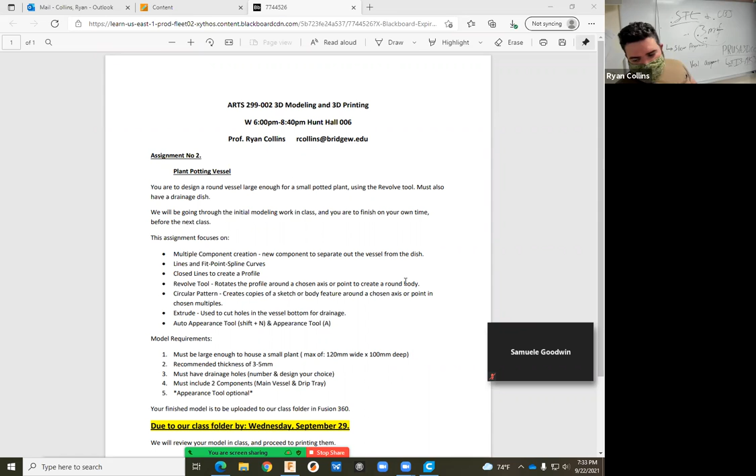So the criteria for this project: it must be large enough to house a small plant. So something like 120 millimeters wide by probably 100 or just so deep. So some sort of vessel like that. I recommend a wall thickness of like 3 to 5 millimeters thick. Honestly, 5 is kind of overkill, but again, modeling it for modeling's sake. It must have drainage holes, and the number and design of which are totally up to you.

It must include 2 or more components. Really just 2 components. Now, so far we have not discussed components. Components are above sketches and bodies and so forth on the hierarchy tree. I'll explain that more in a moment. We'll also start playing with the appearance tool. What that allows you to do is assign appearances to your models. So you're not just working with the default gray or the auto-assigned things. It's like you can assign, hey, I would like this to look like it's made out of aluminum or wood or stone.

Ideally, this is for modeling effectiveness, but that also could potentially build into, if you were taking this to a machine shop or working directly with one, yeah, this is going to be machined in aluminum, and you would go through the steps to do so. But for right now, it's really just for the sake of appearance, so you can make it look like what you want it to look like. And this will be also due next week, along with the badge. These work very much on the same tool sets as the badge does.

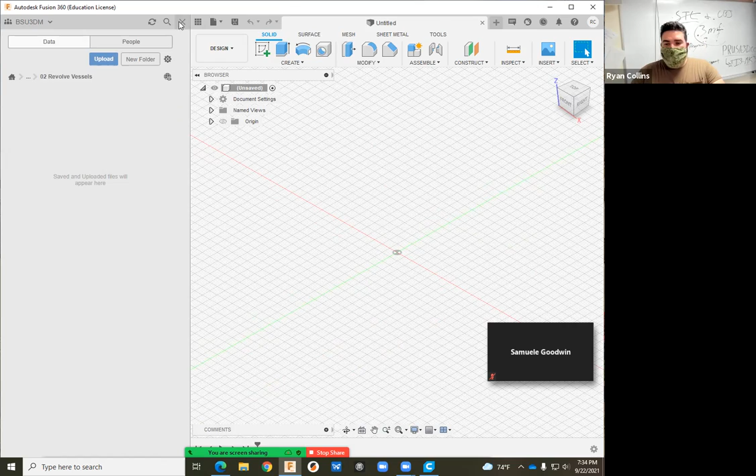All right. So let's get to Fusion. All right. So this will be starting a new project. So in the data panel, remember that we will be in the Revolve Vessels folder. So when you go to save stuff, please make sure it's in there. So you can freeform this. You can model this off of something, whatever you would like. Perfectly fine either way. But I'm just going to freeform this.

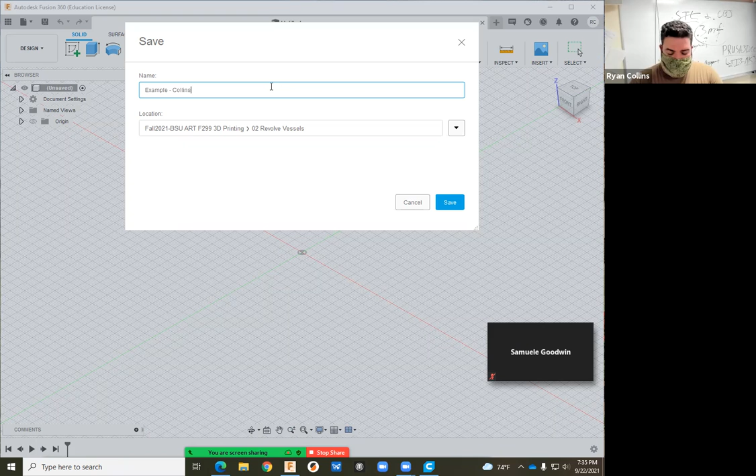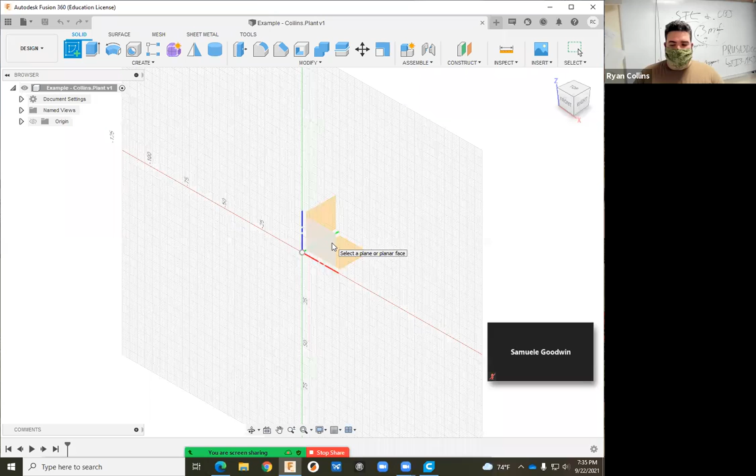So, like I said before, first thing to do, really good, save your file immediately. Save. Example, and we'll do Collins.plant. Sure, there you go. Put your name into the file itself, so that way we know who it is. All right. So we're going to start with sketches. So create a sketch. Before we were working on the XY plane; here I'm going to choose the one in front of me, the XZ plane, between the red and the blue. Ideally, switch the view cube to the front view.

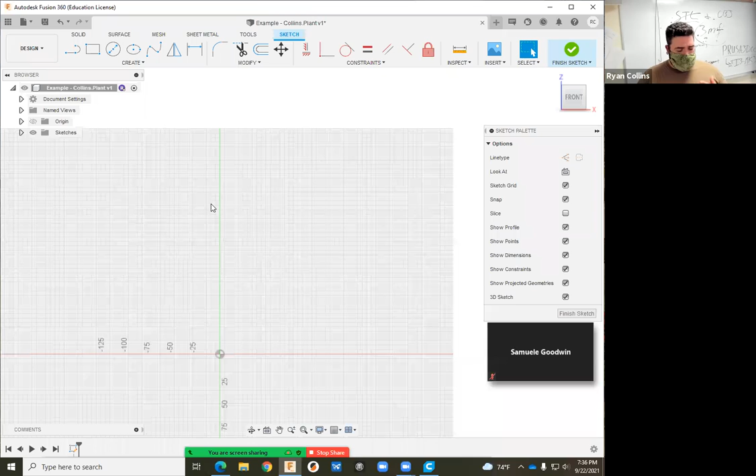All right. So I want to show you a couple things, and one of which is why might you want to use separate sketches, and why might you want to make sure to use construction lines in your sketches. This would be a perfect place to use a construction line sketch for a reference box. What I mean by that is, all right, I want my project to be 120 millimeters wide by 100 millimeters tall. You can go smaller, rough it around that, but that's basically what we're going for.

So I'm going to start with a center rectangle box, and I'm going to select line type construction or press X, and I'm just going to start right in the center. And from there, I'm going to type in 100 millimeters wide. Oh, I'm going to make that 120. And then 100 millimeters tall.

I accidentally made it a little bit bigger. There we go. That makes more sense. Okay. And I'm going to finish that sketch. That's all I want for that first sketch. So I'm going to expand the construction or the hierarchy tree here.

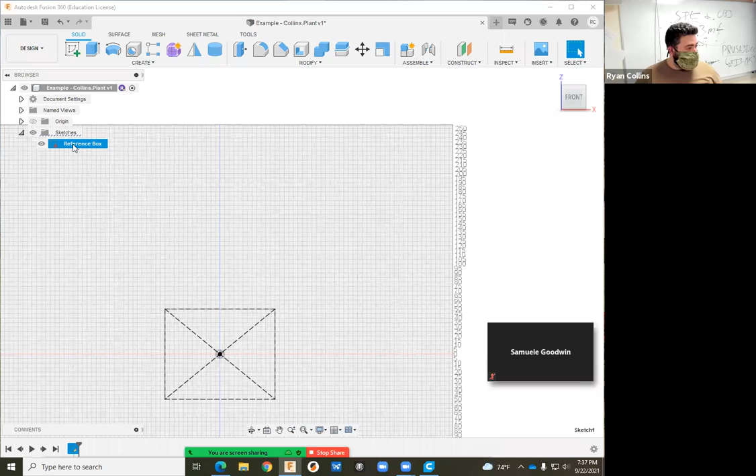And I just want to put in a reference box. So that's just so I know how big the thing is. Once inside of that, I can play around. All right, let me resize to that. Hit F6 to resize. And now I'm going to start another sketch. This is going to be the actual sketch for the pot. Okay, so I want this to be about yay big.

Now, how the Revolve tool works, think of if you've ever taken ceramics and sliced something in half, or you've broken a glass and seen just the edge. You are creating half of a profile, and what we're going to do is use the Revolve tool to create a 360 version of that slice of your vessel.

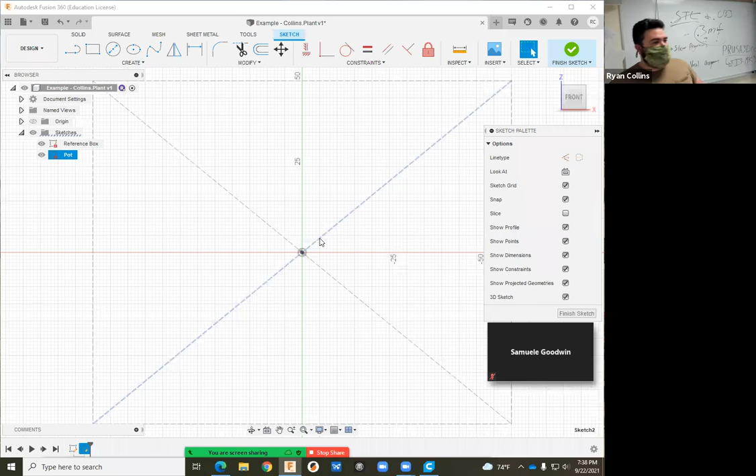Now, you do not need to make both sides. It's not like you're taking a mug and slicing it entirely in half. That, like the old Mad Hatter and half a cup of tea, not quite like that. You only need half of that half, or in other words, a quarter. So you just need one side of a profile.

All right, so what that means is I'm going to start my project on the green line. I want to use that as my bisecting line. And I'm just going to free form a line. I'm going to start somewhere in here. I'm going to allow the snap to lock onto the center axis there. And I'm just going to start drawing outward. I'm using a fit point spline here. I'm going to make this wider.

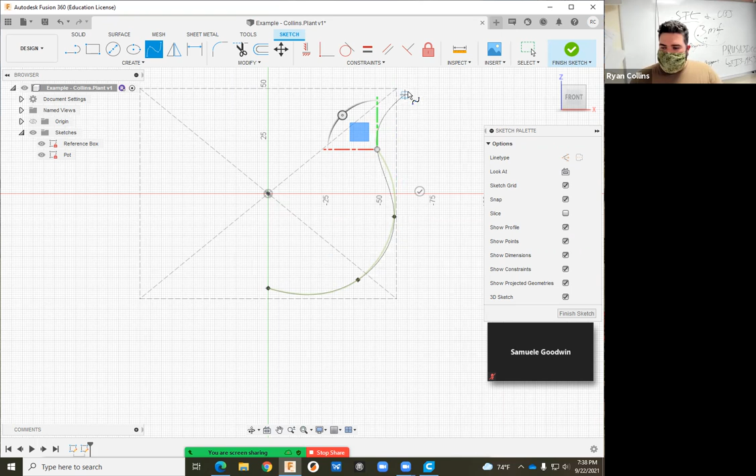Remember, it's going to be a straight line, the first 2 points, and then from there, it's going to start to curve. You can curve upward. You can start to go inward. It's not like you're locked into only being inside of that. If you want it to be a little bit larger, somewhere like that, that's fine. Just giving you those rough dimensions as a general guide. Say, all right, I want it to be about that big. I'm going to make a big wide lip on it. Cool. Hit OK or enter.

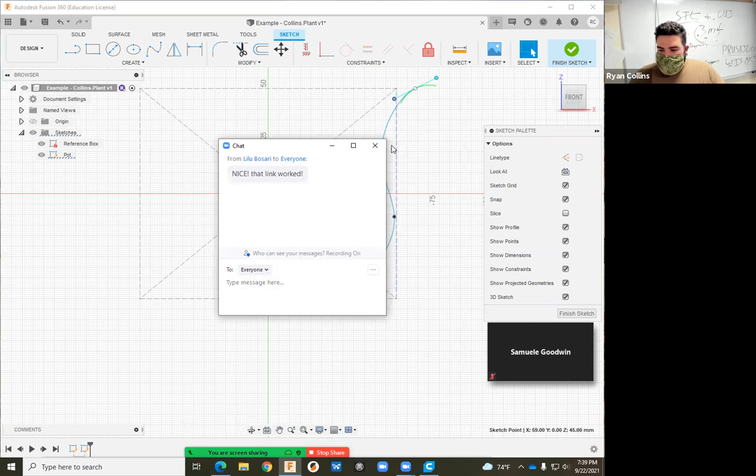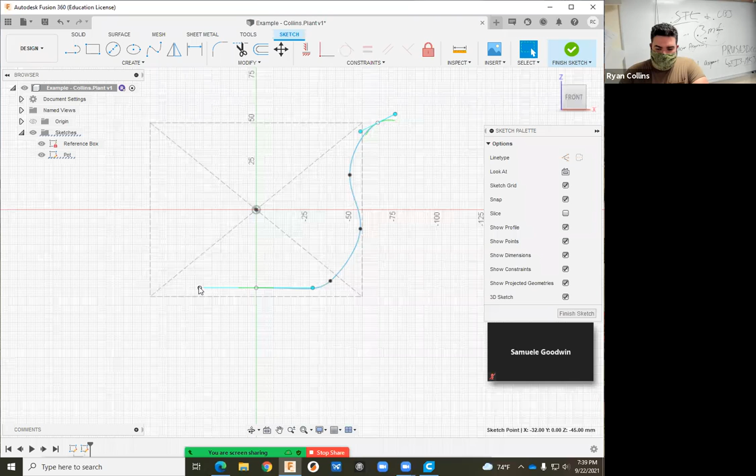Now, one of the things I'm going to want to do is flatten this bottom. I can use the handlebars on this to draw outward and bring that in line. Let me zoom in. What I did is I just dragged that handlebar until it snapped to one of the grid lines. Now the bottom here is more or less flat. Of course, I can still drag this vertex down and make it a little better. There we go. Okay. I hit OK, finish that.

Now, this is where the offset tool is really helpful. Yes. Sorry? That's a separate sketch. So if you see on my hierarchy tree, the reference box, that is the sketch line here. And I changed them to construction lines to use them just as reference points. Oh, okay. Yep. No problem.

So the offset tool here is really helpful because, as it says, it copies your sketch line a specified distance away. You can read it for yourself. But what that means is I can make alterations to my original line and that offset will follow suit. If I made alterations to the outside, depending on what those alterations are, it will carry over to my offset line. Makes it a lot easier to make forms freeform, but maintain certain distances.

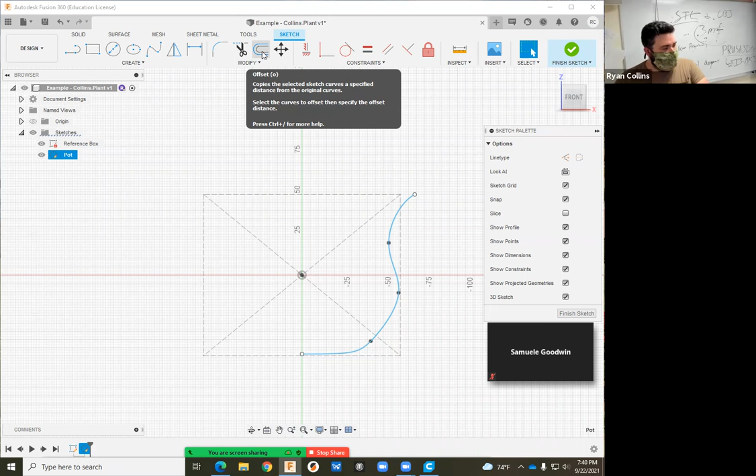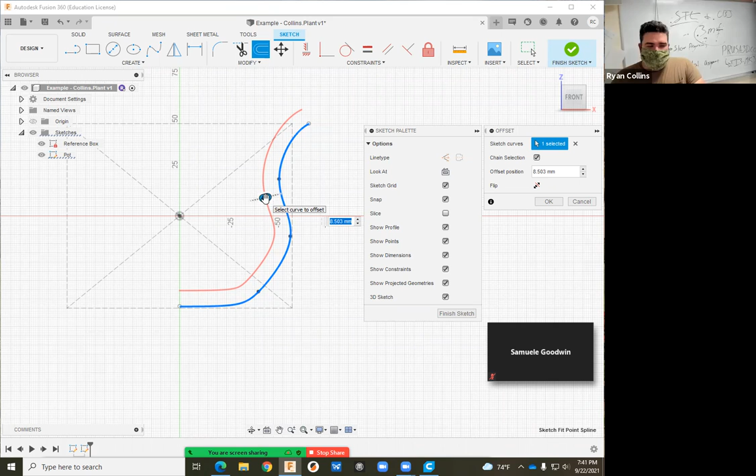So I'm going to use an offset tool. Of course, the box covers that. So there, whoops. You can use the slider or you can do it numerically. Like I said, 8 is right out. Honestly, I would really use like 2 to 3 millimeters. 3 millimeters is a good wall thickness. And there we are. Okay.

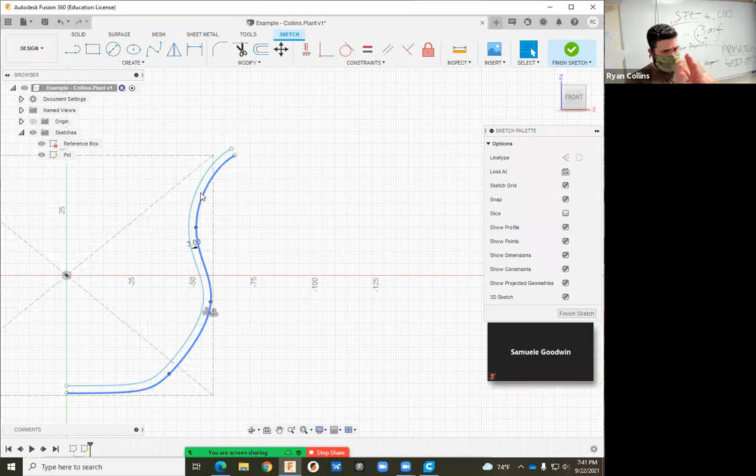So from here, in order to make the Revolve tool work, this needs to be a closed sketch. Right now, these are just 2 blue lines, but there's no blue hue inside to show that it's a closed sketch, meaning it's 2 open lines. There's no cap between them. So what I can do is I can just draw lines between here, or I can play around with that.

So for right here, what's going to be the base of my Revolve, I'm going to just use a straight line, connect those 2 points. Hit OK. All right. For up here, I could draw a straight line between there, but that's boring, and I don't want to do that. I don't want it to have a sharp lip, effectively. If this were a glass, you don't want it intentionally to have like a sharp lip. I want that to be rounded.

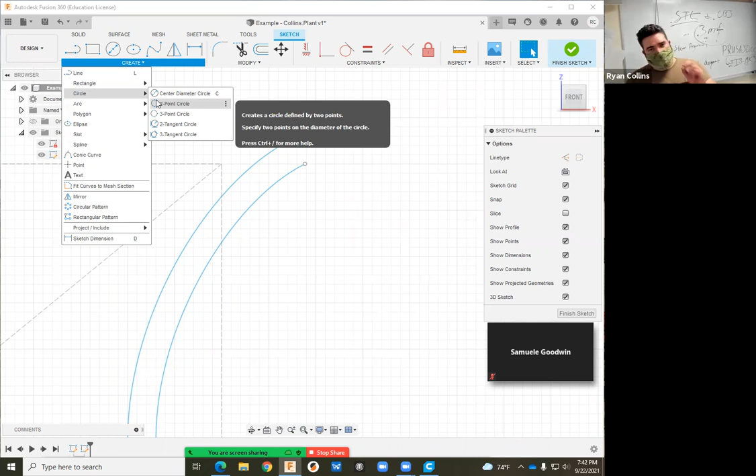It's just my preference. So to do that, I could use either an ellipse tool, or I can use a circle tool. But rather than have to draw extra steps, I'm going to use the circle tool, but I'm going to use the 2-point circle. So what that does is rather than starting in the center and drawing outward, you start at 1 point, and then the second point defines the diameter of your circle. So click there. I'm going to select 1 point, and then you see it draws outward, which, what do you know, the diameter is 3 millimeters. Click there, hit escape to finish that tool.

Great. So now you have these 2 separate lines, and now when I mouse over, it shows that by highlighting like that, they are closed profiles. Now I do want to trim this section out, so I'll go up here, use the trim tool, or just press T, chop that little chunk out of there. There we go. Hit escape. Okay. And in effect, the basic part is that's all you need for a profile. So I'm going to hit finish sketch. I'll come back and tweak that in a few.

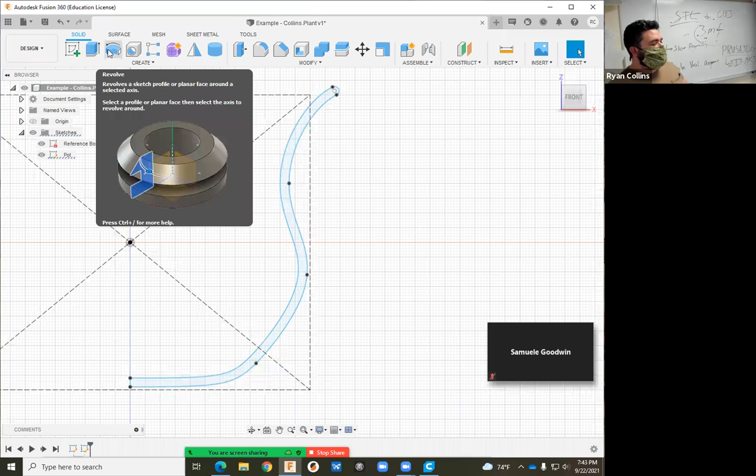The next tool I want to use is the Revolve tool. So whereas the Extrude tool took a profile and drew it straight out, what the Revolve tool does is it takes that profile and revolves it around. Often this is also called the lathe tool. So if you're familiar with working with a lathe, your material is spinning and you're cutting away from it. Kind of sort of the same thing. You're creating just a singular profile and rotating that around.

So I'm going to select that. Toolbox comes up. Select my profile. That one, the one that I did make. Now, unlike the mirror tool, you can just use the basic axis as your rotating axis. So the next tool, select axis. I'm going to hit the home button so you can see a little bit more clearly what I'm doing here. So now looking at a perspective view, you can see I just have this one single profile floating in space. I'm selecting the Z axis as my point of rotation.

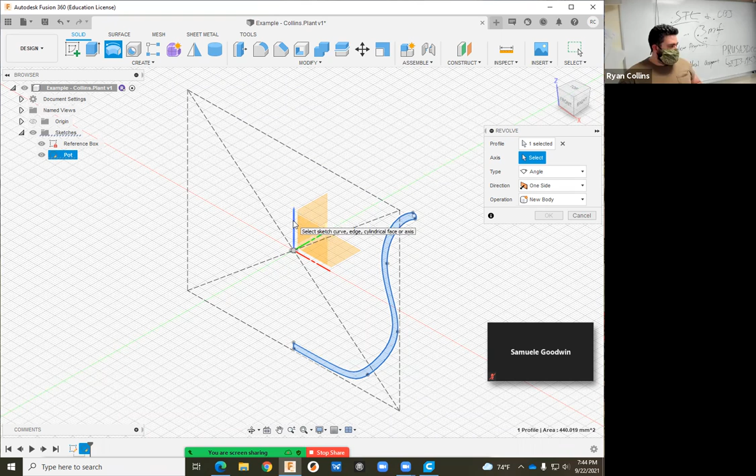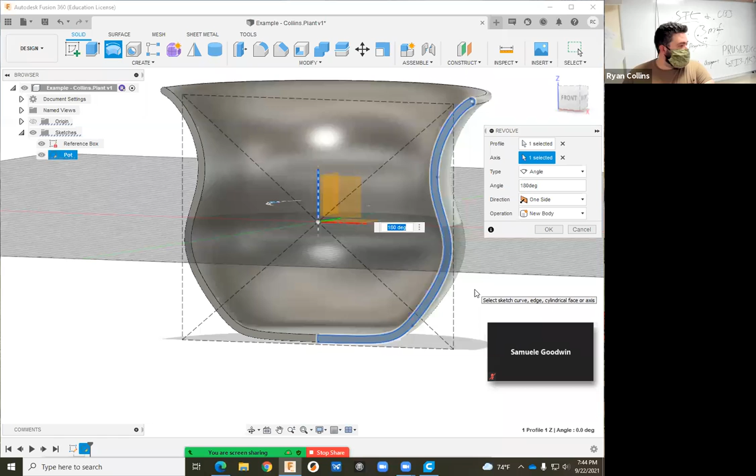Boom. Instant vessel. Now, this is set on angle, and you can dial this back. Say you were actually making just part of this. Maybe I wanted just half of a pot. I wanted to make that half a cup of tea. Type in 180 degrees, and now you can see what I meant by a cross section there. Just that little chunk. But for what we're doing, I want the whole thing. So back to 360. Hooray. All right, now this is going to create a new body. Okay.

So far, I've created just that vessel. Yeah, it's a little large, a little garish, whatever. You play around with it as you like. But I want to create the plate that it sits on as well. I'm going to get to the features and such. But so far, as I've said, you will need 2 different components. And so far, we've been just working on one.

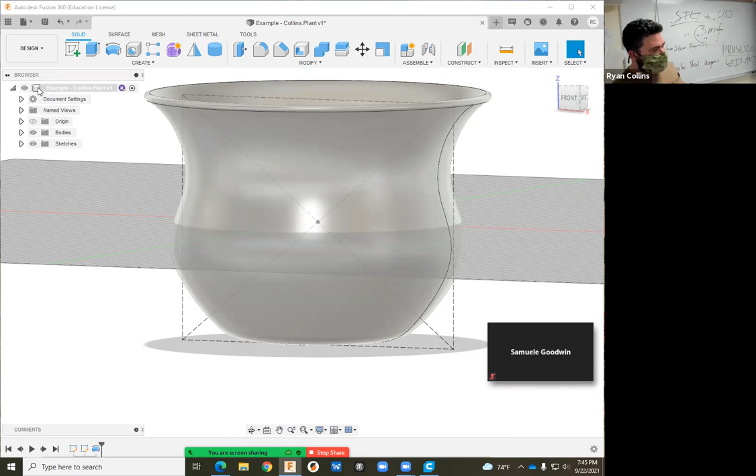A component is the highest type of hierarchy on the hierarchy tree. What that means is a component can contain bodies, sketches, canvases, all that sort. And then you can make another component and it can have its own set of all of that. The reason for this is so you can separate elements out and not just by bodies. Later on in the course, I'm going to show you how to create hinges and joints between 2 separate components, and they need to be separate components.

Now, when you go to create a component, when I'm mousing over right here, this little square, that's showing me that is a singular component. To create a component, you go over to the assemble section, the top one, that's by default, this little stack of cubes. This says new component. Click here.

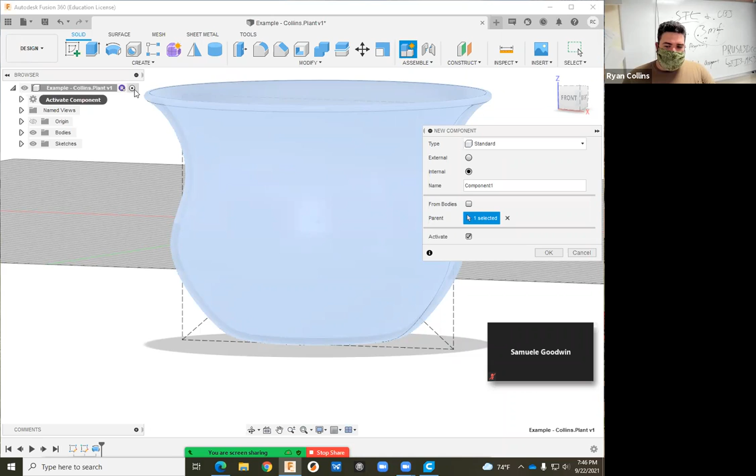Now, you can create a new component from separate bodies. So say you actually built a whole bunch of stuff within the same component. You got a stack of bodies, and you want to make a new component out of one of those, you can do that. But for right now, I just want a separate component entirely. So I have the main part selected here, and I'm going to show you what I mean by that in a moment.

And I'm going to click OK. Now there's a new thing here. So a couple things happened. The body there, it ghosted itself out. That's because you're going to be starting a new thing entirely. Top of the hierarchy tree, let me collapse everything. Now you see that the symbol has changed. It's a stack of little squares, or cubes rather. That's showing there's multiple components within that component, or at least there's more than one.

So we've got down here, and I'm going to put this as tray. Okay. So now I can expand this out, and right now there's only origin. But I can now build a set of sketches and everything else within that component. And when you're working like that, you have to activate the component. So unlike all the way to the left, which hides and shows the little eyeball symbol, this little checkbox here, activate component. If I want to go back and activate everything, I go to the very top, click there, activates all the things. But I just want to work on just the tray component.

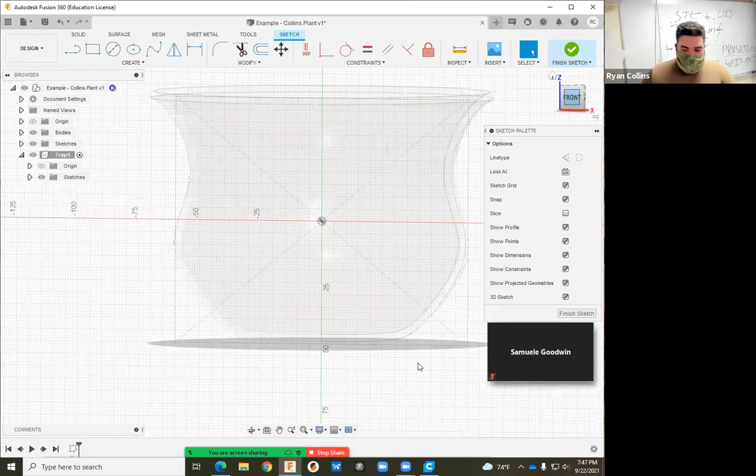All right. Now, when I click create sketch, working on the same plane rather, right there. Now you see it's expanded and created sketches down there too. All right, cool. So now I'm going to do the same thing. I'm going to create a tray. I want to use a fit point spline again, somewhere below there. Doesn't have to be right against, somewhere below. And I'm just going to kind of draw what would become a little tray. It's going to have a little bit of a lip. Hooray. There we are. That'll work.

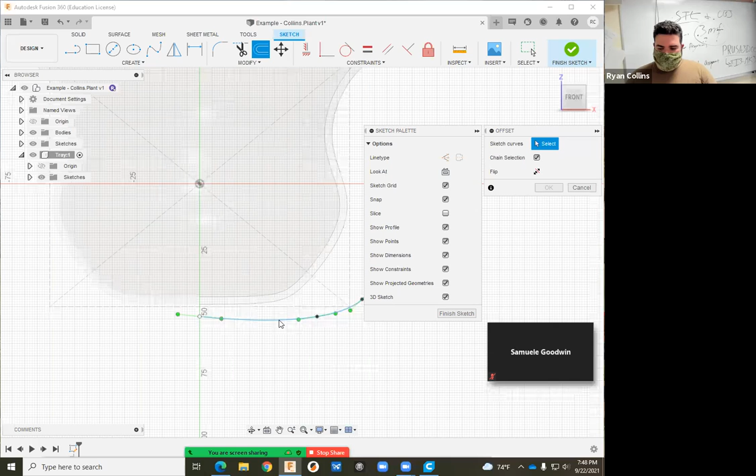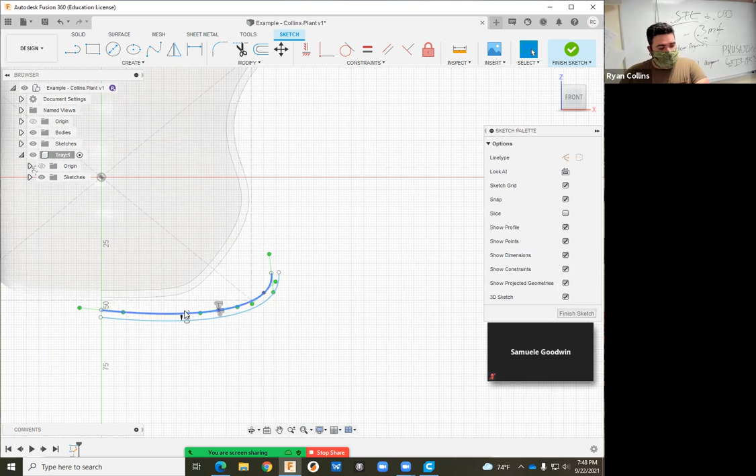I'm going to use the offset tool. I'm going to go outward from here and make that 3 again. Whoops, I need that -3. I want that to go the other way. All right, there we go. So now the new offset line is larger rather than smaller than the original line. Okay, super. Now, like I said, you can adjust these. Things like this little dip in what will be this tray. If I were to make this, that would make for a very bad plate.

So I'm going to zoom in here, and I'm going to adjust the handlebars on the initial point. Yep, that one. And as you see, now my offset line follows the tweaks that I'm making. So that's how you can adjust all of this stuff. Really helps out. This one's still not quite flat. I'm going to drag this around. Yeah, sort of, kind of-ish. One is an offset of the other. Oh, okay. Yeah, of course.

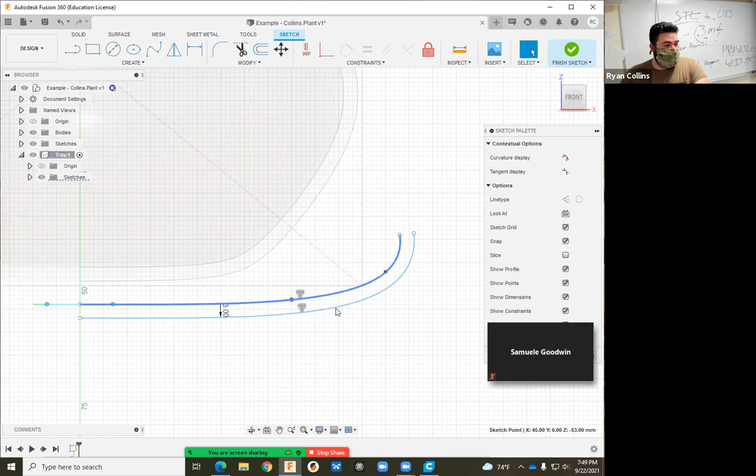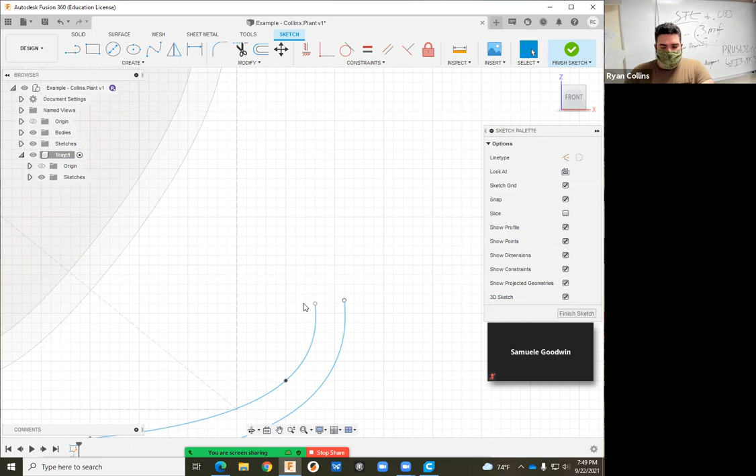All right. So from here, I'm going to go ahead and close this up. There we are. Zoom in so I can actually grab that point. Okay. Hit escape, the line tool. Now for this one here, I want to play around with this a bit more. So I want to make a circle, but I want to make it larger than that one. I could do this a couple of different ways. I could start a line, and I'm going to use this as a construction line. I'm going to draw between these 2 points. All right, great. Now I'm going to make a circle, but the reason I drew that construction line is because I want this circle to start in the middle, but I want it to be larger than the two ends.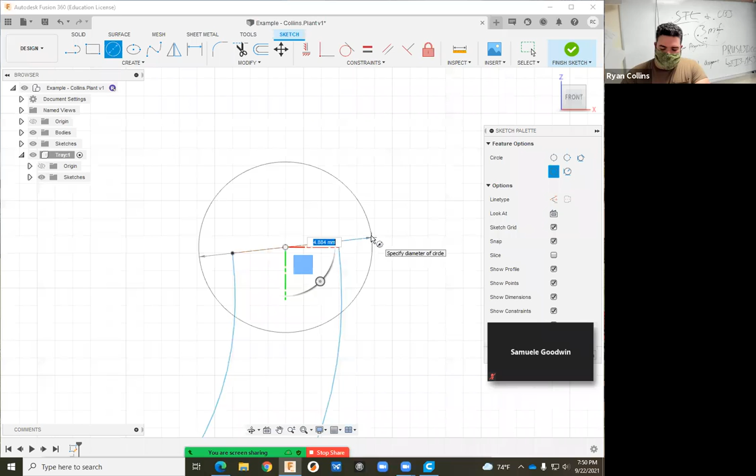So I'm going to use this construction line, and as I mouse over the construction line, the cursor turns from a plus to an X, and then when I get close to about the center, that little triangle pops up. That is your constraint symbol for center. All right, select there, and instead of this just being as wide, I want to make it a little bigger, just because it adds a little flair. Okay. Now from here, I'm going to trim out some parts. Chop, choppity chop. Okie doke. That works for now. Finish sketch.

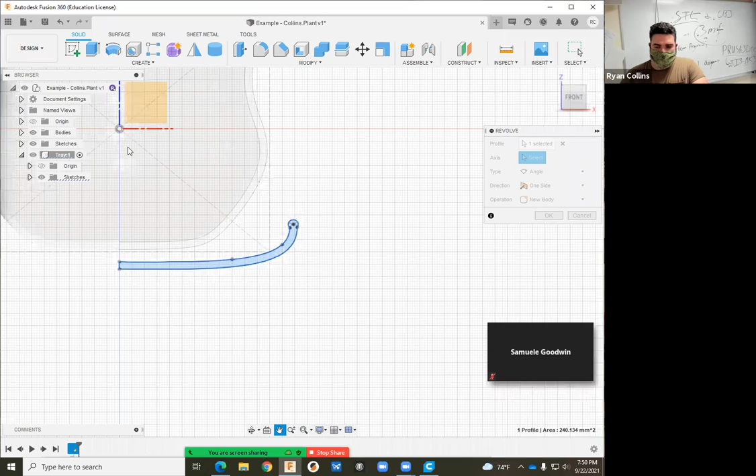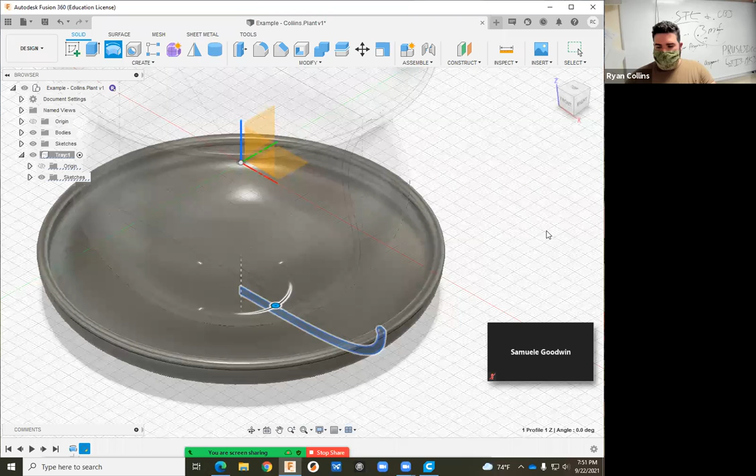Okay. Now when I go to revolve this one, it pre-selects that profile, axis, same. I'm gonna have to zoom out so I can get at the Z-axis. Whoop. Automatically creates a little tray. Super friggin' duper. Okay. New body within here. This is where I said before, you can create new components. You could be drawing everything under one component and then start a new one just on its own. It's not going to have the same sketches and everything, but it'll be its own isolated component if that's what you want, but I'm just going to do a new body. Okay. All right. Well, super.

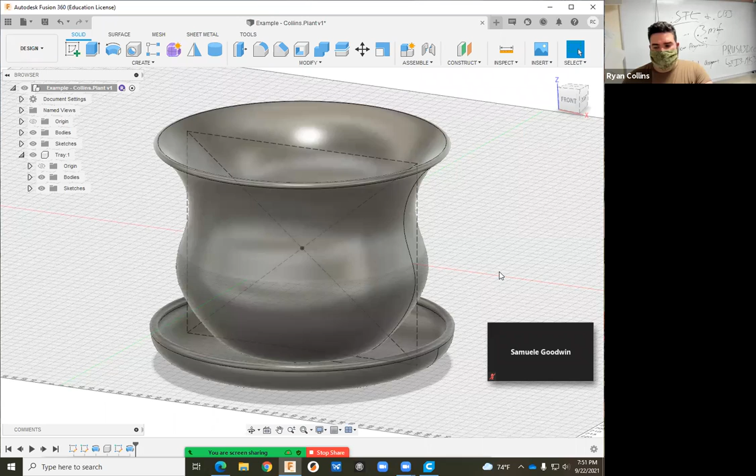Let me go all the way back up, reactivate the whole thing. And I'm going to use Shift N, as in Shift November. This is going to auto assign colors to the different components so you can see more clearly what you're doing. So the default one, this light gray, is actually an appearance of steel. That's just the default setting. You can change appearances by pressing the A button.

This is how you bring up appearances. And this is where you can just play around, find some stuff you like. You want to make it glass? Look for glass. And let's see, smooth glass, cool, pretty blue. You can select, drag over an item, and it will take on that appearance.

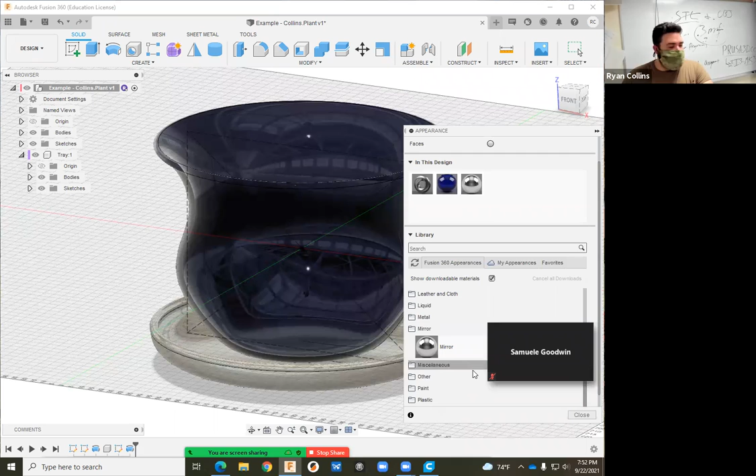All this grid work and stuff is a reflective surface from what's below, or from the default image map that's wrapping around it. Maybe you want the bottom to look like it's a mirror. Boom. Play around with these. It's fun. For this part, we're just playing with the appearances. Doesn't really mean anything right now.

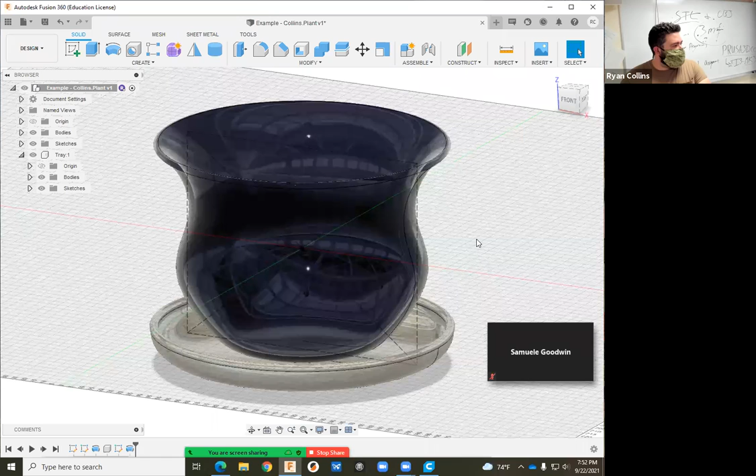Now, it switched back in my automatic view. That's because I am still on auto color assign. If I switch back, now I'm on the appearance mode. So, like I said, the appearances are just for grins, just so you can play around. But I'm going to switch back over so you can see more clearly.

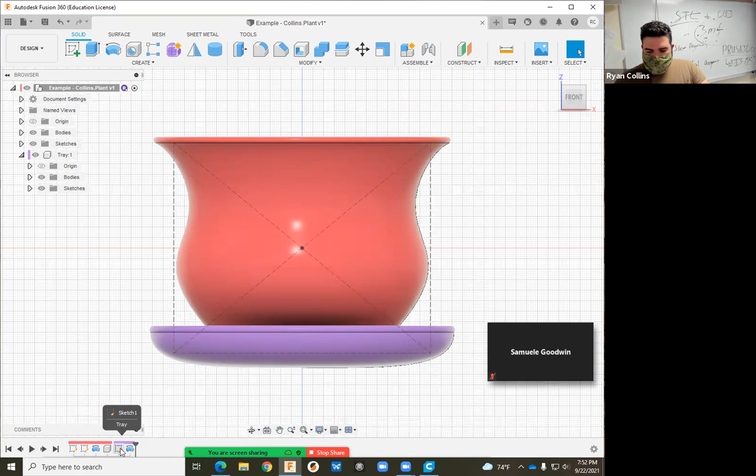Now, time to add some features. Things like on the tray. If I made this dish and printed it and tried to make this a solid object, it would roly-poly around on me. I want to add a foot to this. So what I can do is now I can go back, find the sketch for this part. Let me reactivate this component. Right-click on the sketch, edit sketch.

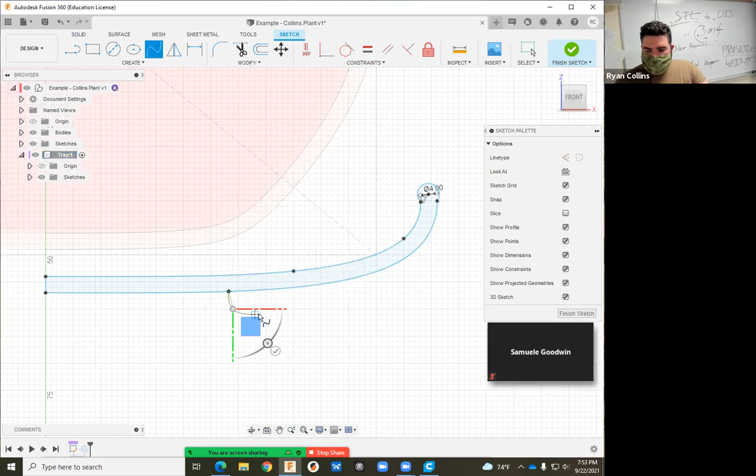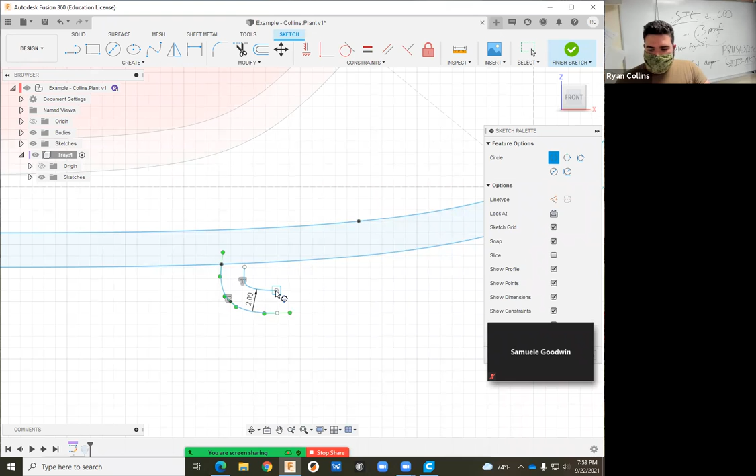Now what I want to do is I'm just going to go in and add a foot. I'm just going to add a fit point spline, I think, somewhere. And I'm just going to draw a little doodaddy. Okay? Little thingy thing. Use the offset tool again. We'll do 2 millimeters. Sure, okay. And from here, we'll use the 2-point circle again, connect the dots, makes a cleaner end.

Sometimes it does that. Didn't actually draw because it got in its own way. There we are. Now, one of the problems here is that offset line does not connect. So what I can do, use the move tool, select that vertex, drag that upward, but because it's got a coincidence constraint already built onto it, it's not letting me. It's dragging the whole thing.

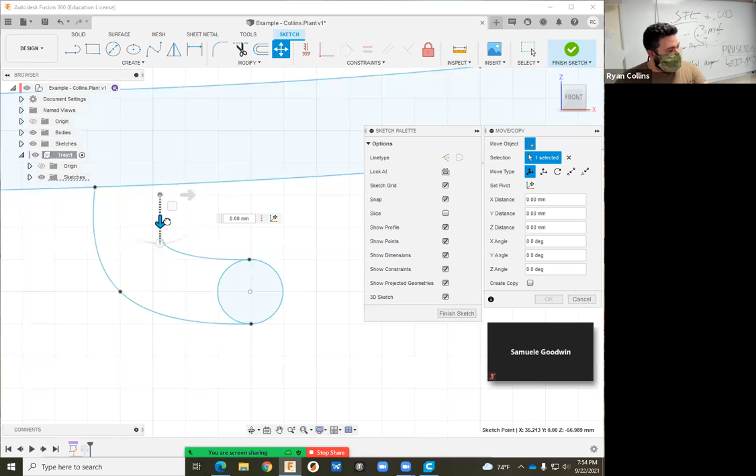So I need to escape. I need to right-click on that point. Go down, delete coincidence. That's going to allow me to move that point now individually from the original. Problem is, it's still going to have its own constraints built up. So this is one of the times where offset is not as useful. The workaround for that, just draw another line. There you go. That's all I needed to do.

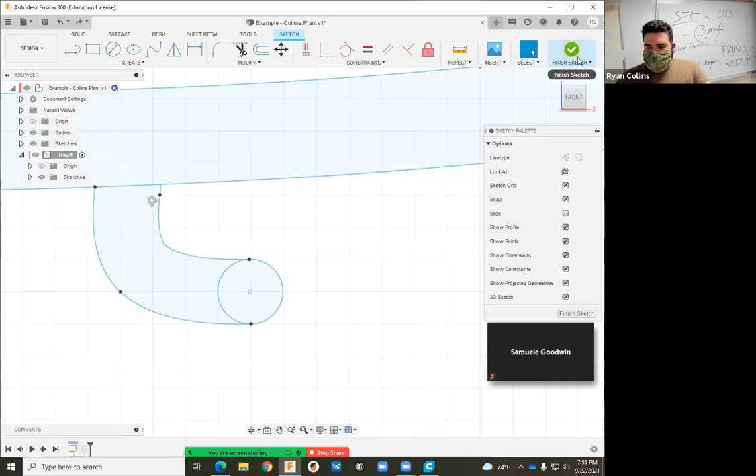All right. So I'm probably going to tweak this a little bit. Click on there. And always just play around with it. Do all kinds of different weirdo things to it. But okay, finish sketch. Now that disappeared. Crap, what happened? Now I have to adjust the revolve. Edit feature. Need to go back in and select those parts too.

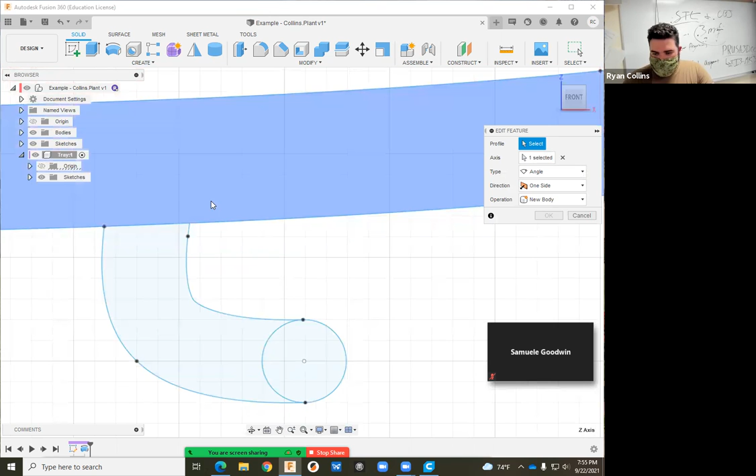What's going on here? Might not be connected all the way. Nope, they're still there. So then fine. We'll just select all the things. There we are. All right. Hit OK. Now when I orbit down, now my plate has a lovely little foot. So really easy way to add features like that.

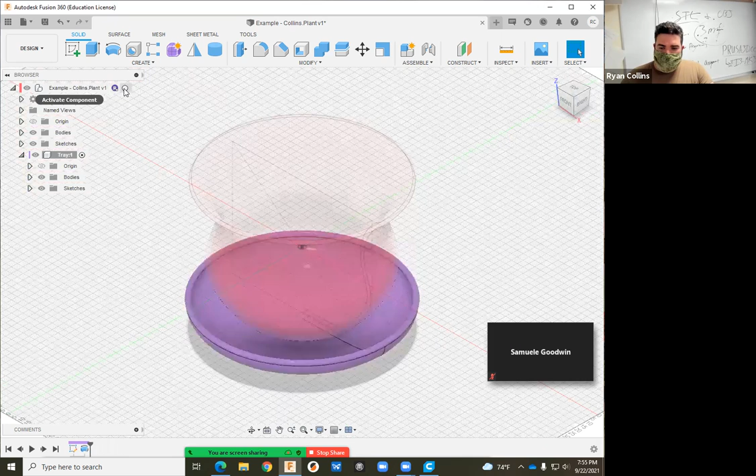All right, cool. But I want to work on the vessel itself. So I'm going to go reactivate the whole thing. And I'm going to hide the tray for now. I don't want to work with that. All right. So now I want to add a foot onto this one as well. We'll go a little more simple. I'll go back into this component, find my original sketch. There we are. Edit sketch. Let's add a foot to this.

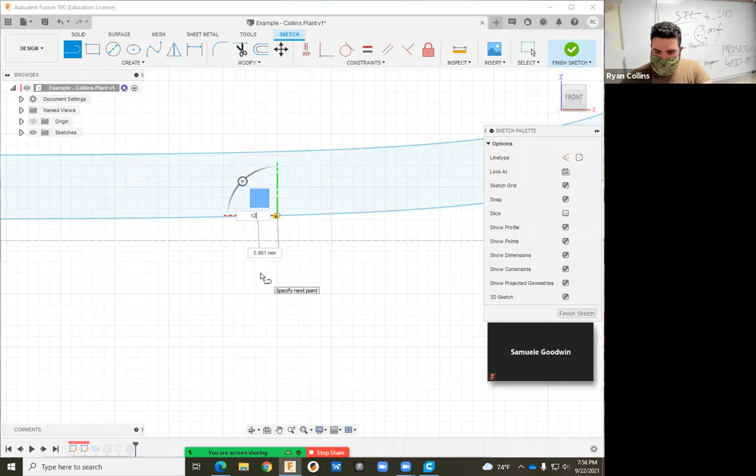For this one, I want something a little more angular, so I'm going to start on there. And just going to look at angles, let's say 120 degrees, just for grins. And we'll make that little foot 2.5 millimeters long. What happened? Oh, I forgot to tab over. There we go. Make sure you're tabbing over. Okay, one line down, let's make another.

So now I can move this over, select, we'll use the offset again. Now, this is going to cause some funky stuff, so maybe instead of the offset, I want to use something else. Cancel, and instead, I'm going to copy and paste this. Or what I can do is bring up the Move tool, and at the bottom of the Move tool, you'll see this checkbox, Create Copy. That's an easy way to also create copies at the same time as you're moving them over.

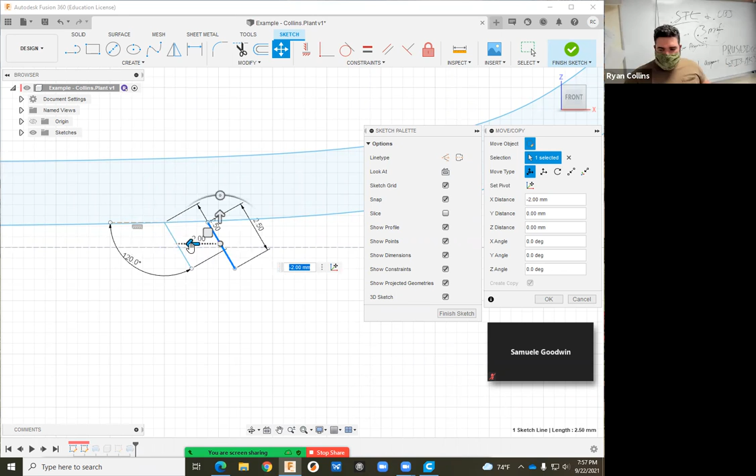So I'm going to do that, move one over, and you see it's going along in a straight line. Mildly problematic, but not really. So 2 millimeters, sure, why not? Okay, sounds good. Draw a straight line between those.

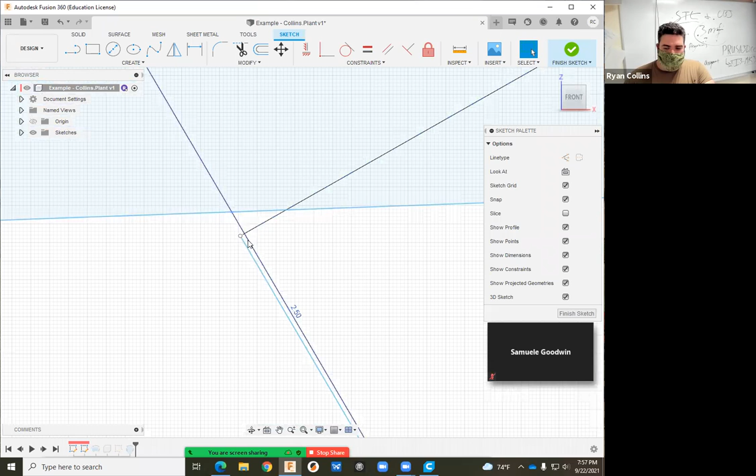All right, now zooming in. Well, I just drew that line over. What's going on? It's not the same profile, or it's not closed. Zoom in further and you'll see it's not quite there. So anytime that something is not showing up, always a good idea to just go ahead and make sure, zoom a little bit closer, further in, and see if it's actually closed.

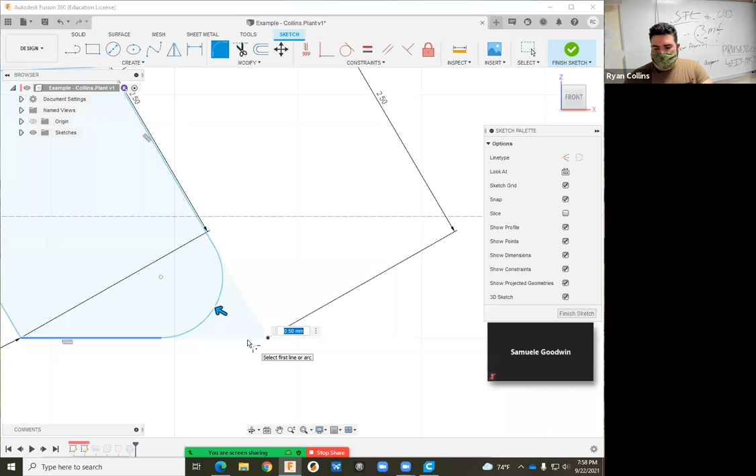All right, got that. I don't want these quite sharp angles, so I'm going to use the fillet tool. There's a fillet tool within the drawing. Go to there, and maybe more 0.25. Neat. Do the same. Flip floppity bloop. Okay.

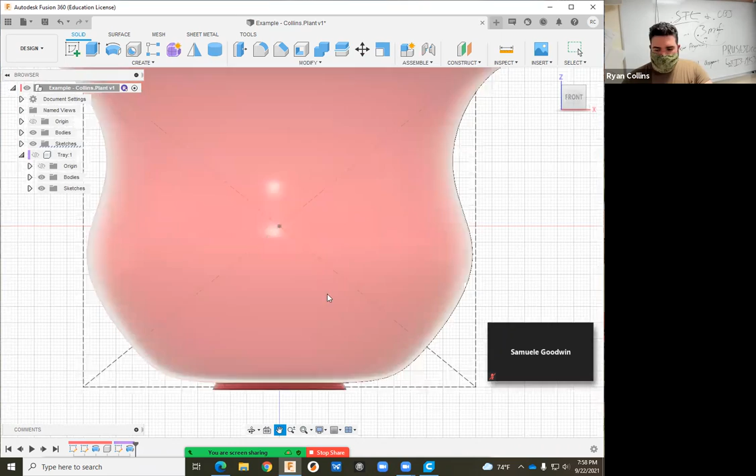Now I am going to trim this out so I don't have to go back and make some adjustments. Now that did mess with the original drawing, so we'll see what happens. Finish sketch. No big deal. Now my big urn thing has a little foot. Is it too small? Yeah, probably, but you get the idea.

Now, as I said before, one of the things is you need to make sure there are drain holes on this. All right, well now I want to make a hole in the bottom, but I want to make multiple holes. So this is where you can use the sketch tool, the circular pattern, but I'm not going to use the circle pattern in the sketch itself.

What I'm going to do instead is I'm going to create the holes, add any additional features to those holes, and then use the pattern tool to recreate the completed feature all around. It will save me steps rather than having to go and do each one individually. So it's a different way of working to get to the same effect.

So what that means is I'm going to start a new sketch on this component. New sketch. I want to work on the XY plane, looking straight down. Top view. All right. So if you're going to be creating multiples, I highly recommend you work off of one of the major axes, meaning don't just draw somewhere out in between in space. Start it somewhere on one of the major axes.

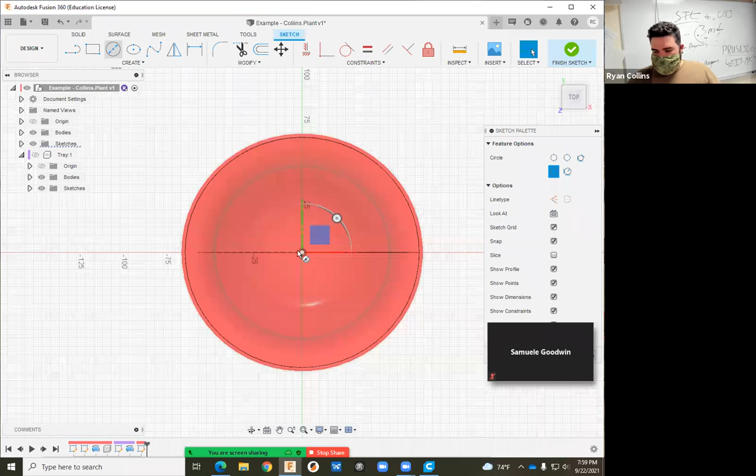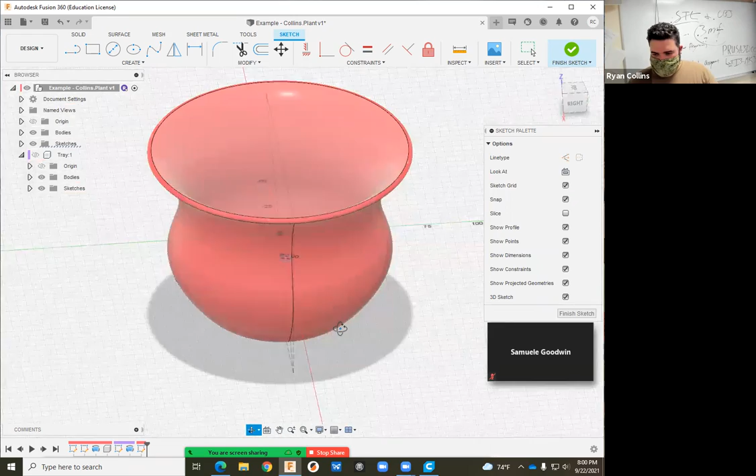All right. So I'm going to create a circle somewhere around there. Now that might well be the problem because that might be actually where my foot is. So we'll start and go from there. We'll make this 6 millimeters. That's probably about right. Okay. Is it right on the foot? Maybe. Find out soon enough. All right, so let's finish the sketch.

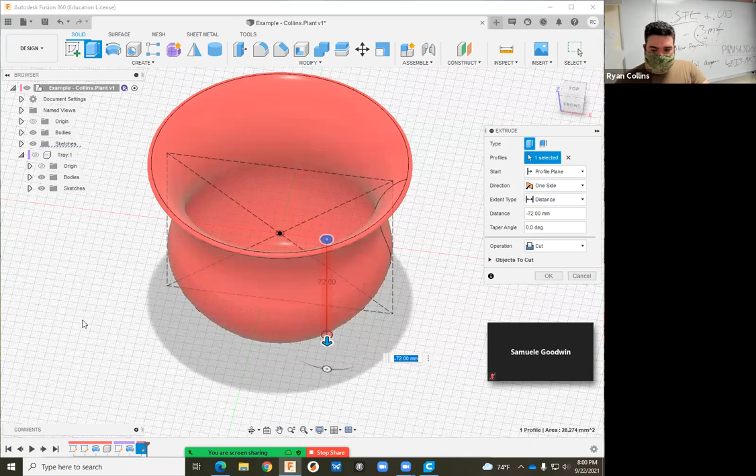Now, I'm going to use the extrude tool to cut through. So, extrude that profile, and now I'm going to drag it straight down. And you'll see that the operation automatically changes to cut. Now, one thing I want you to take note of. The tray is hidden right now. If I did not hide the tray, that cut is going to extend through both components.

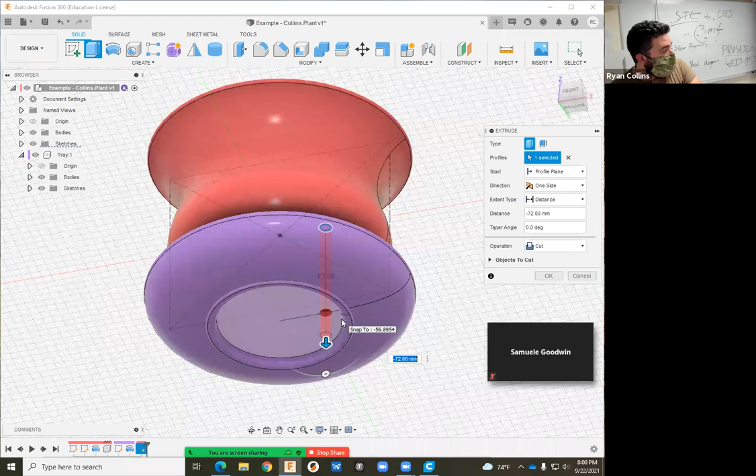Fusion works on whatever is visible. Even though I'm working on the other component of the plant vessel, not the tray, because the tray is visible, it will affect that tray. So keep that in mind. If you're trying to avoid that, hide the tray, all set. Also, you can make that a little bit shorter, but okay, that works. Cut. Now it's using that extrusion to make that little hole there.

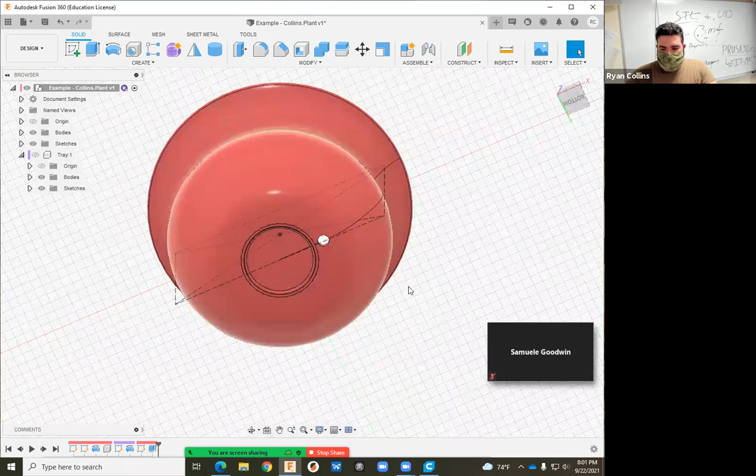All right, so what I want to do now is I want to put a couple fillets on that hole. I can select both the rings or I can just select the edge there. Let's see, about one. Yeah, 1 millimeter works. It just rounds that out. Actually, it's a little bit large. I'm going to use 0.5. All right, there we go. So all that did was just round over those edges.

Okay, so like I said, rather than create each individual thing and make multiple fillets and multiple holes, it's a lot easier to create that one completed feature. Now I'm going to use the circular pattern to create multiples of the same.

So I'm not starting a new sketch. That feature is still within the create section. It's just that it's also in the sketch tool set. So select on down to pattern, circular pattern. Now you have different options for the faces. You can make multiple bodies, components, whatever, but I want the faces.

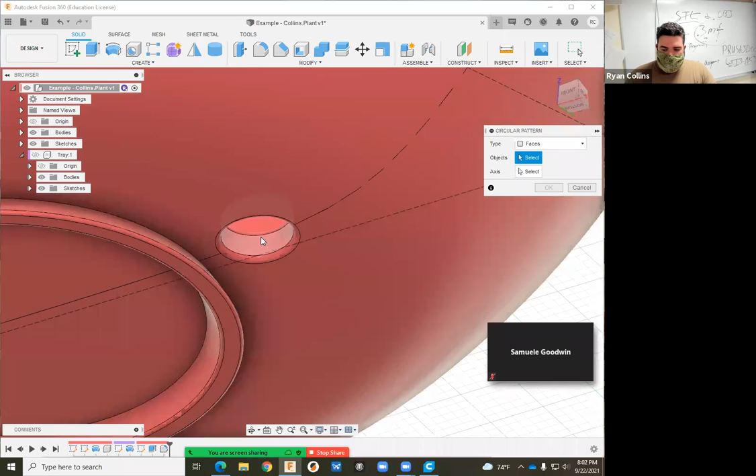So you can't quite select everything from here, but if I do a from-the-left selection box, it's only going to select what is completely inside that box. Let go, and now it's selected just that. Great. Okay, axis, same. Now this gets sometimes tricky. If you can see what you're doing, great.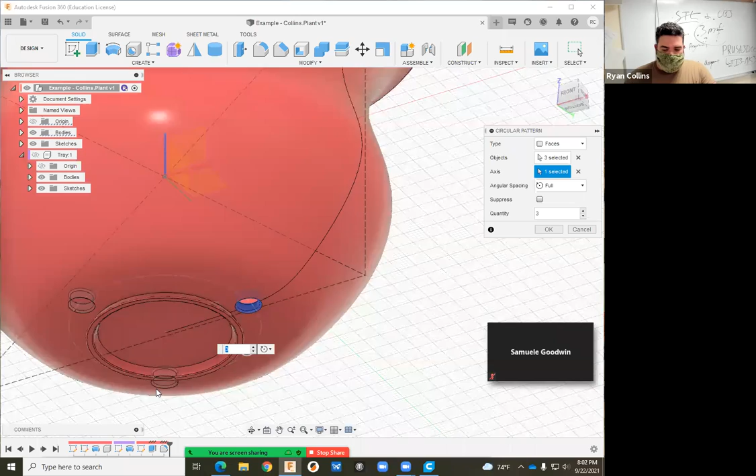When you're working like this, you might have to hide that body to get to the axis point, then you can unhide it again. But see how now it has recreated that feature multiple times. Now it's still opaque because I haven't completed the tool yet. From here, you can make multiples, 3, 4, 5, more.

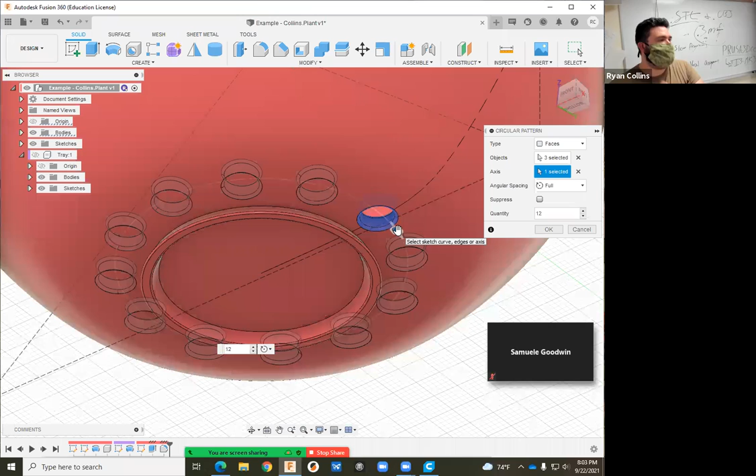Like I said, this is one of the things where I don't recommend using the slider. You can, but as you use the slider, especially if this is a complex form or a complex feature, it can really bog down your computer because it's recalculating every single time. I really recommend doing this just by numeric input, so it's only calculating that one time.

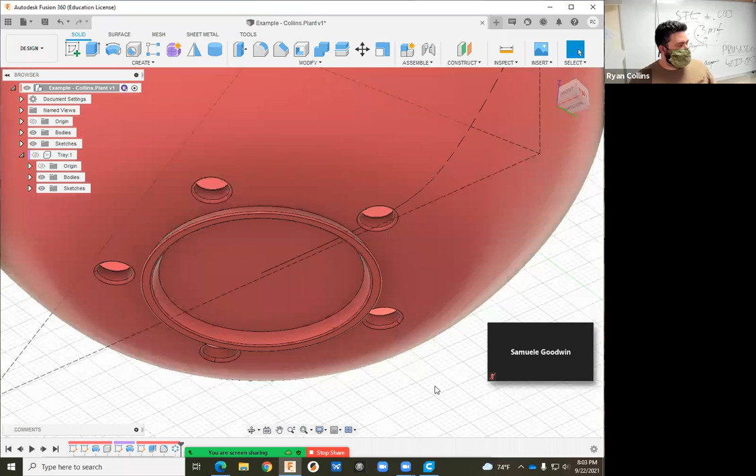So especially if you had a really complex thing and you're making a couple hundred of them, like making teeth on a gear, it can really bog your computer down. So there you go. All right, 5 holes, click OK, blip, bloppity, bloop. Now you've repeated the completed feature rather than having to make multiple steps for each one. Just an easier way to work.

All right, we zoom out. And from here, that's effectively the project. Now, are there more things you can do to this? Absolutely. These are the basics of the project. Let me unhide the tray. It has a foot. It's a separate component. My vessel has drain holes. For the most part, we're good.

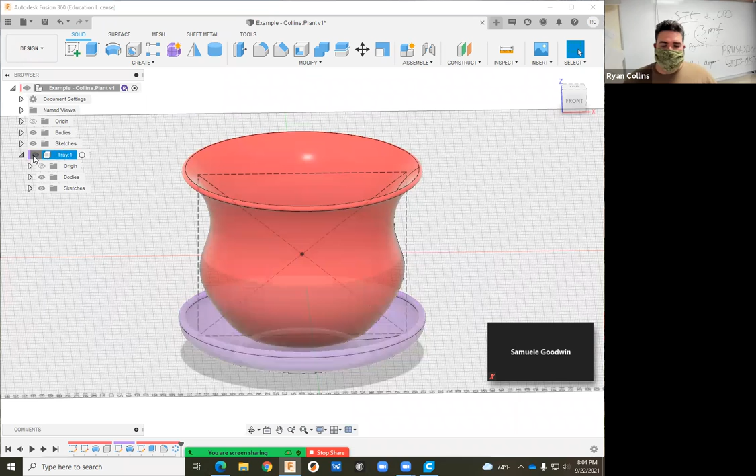I could do other things to this. Say maybe I want to make this into an orchid pot, so it has multiple holes on the sides and such too. This is where you can add additional features. So hide the tray. I'm going to hide the body for the moment. And I'm going to create a sketch on the face here, but I'm just going to kind of freeform something here.

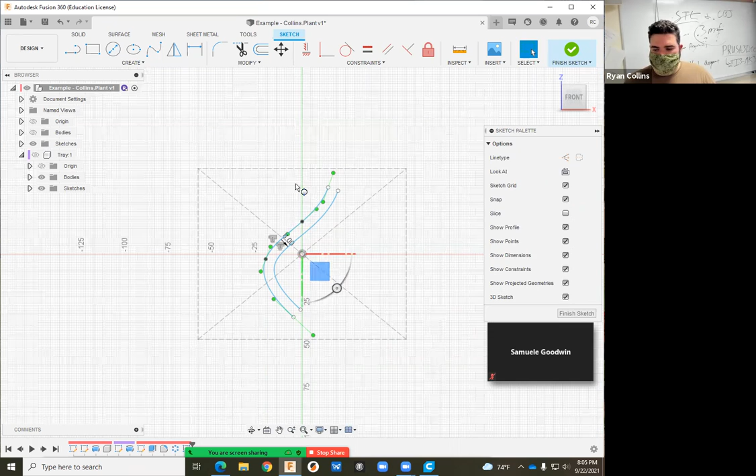Let's just kind of doodle and make some weird doodadery. Okay, that works. I'm going to use the offset tool. I don't know, sure, 6. Neat. I'm going to again use the 2-point circle. Make a couple of features here. Two gumdrops. Do it again. Trim and trim. Okay, finish sketch. Super.

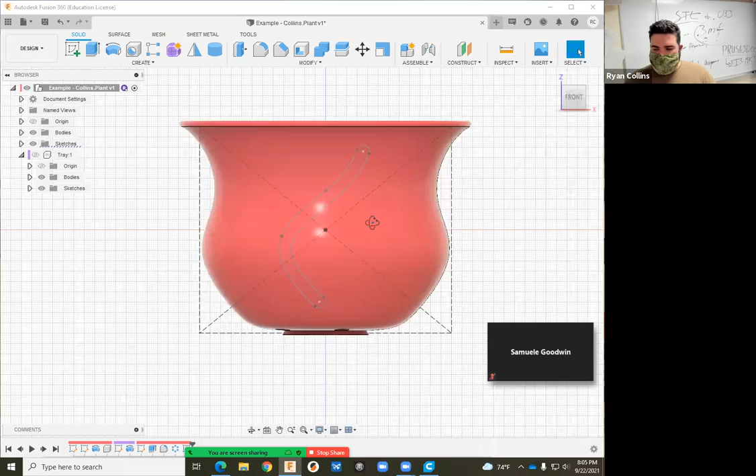Unhide body. Now I'm going to use the extrude tool. Pull that forward. And now that has cut through the side of the vessel itself. Cool. Super good. I can go through and use fillet again. Maybe I want to just round those out just a wee bit. 0.25. Probably good. Hooray. Well, now I can do the exact same thing that I did to the bottom, to

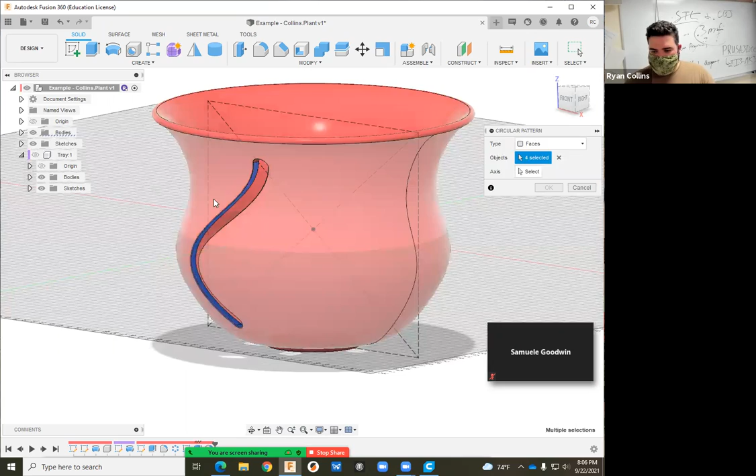the sides. So I'm going to use, again, pattern tool, circle, faces. I want to select all of that. It's going to be a little bit harder to select the whole thing there. Hopefully I don't select all kinds of other stuff. Might have to just do this by hand. Or orbit upwards. Didn't get everything. Damn. Deselect. There we go. Okay, selected just those internal faces. All right, axis, back to the Z axis.

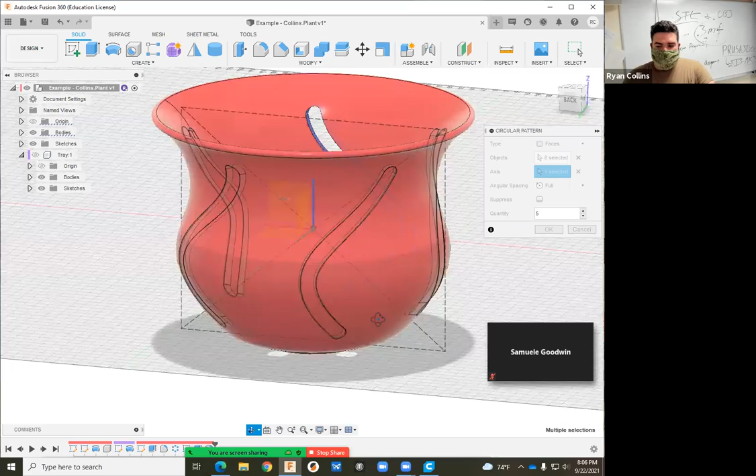This is how I could create multiple things along the surface now, because it's going to completely hug that original geometry. So this is why I say it's a lot easier to use the circular pattern tool on a completed feature rather than individual things. Same thing with using the slider: if I make a whole bunch of multiples, that's really going to bog down the computer. We're good. Spacing, a little off, so maybe I'll drag that down to 24 instead. Okay.

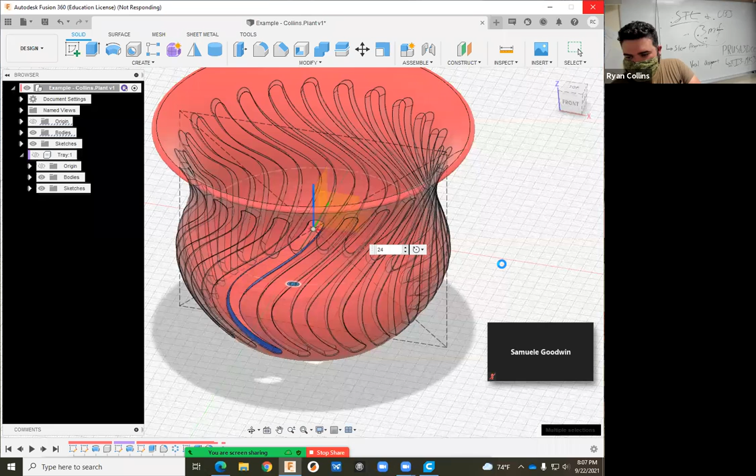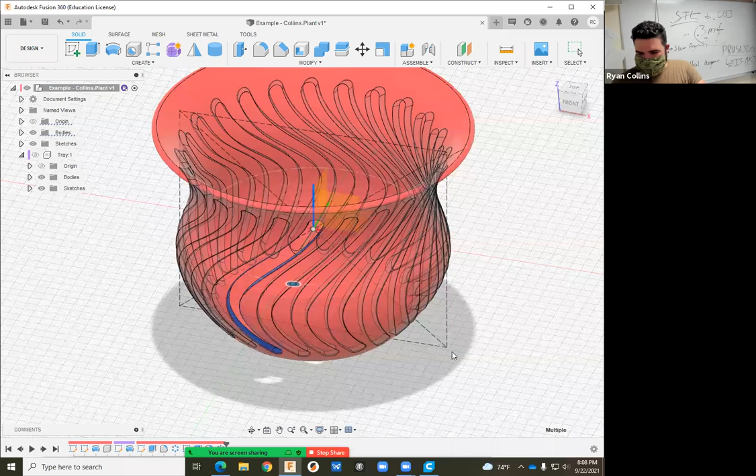Just going to think about it for a minute. That's what I mean by I can bog down stuff pretty good. Plus, I'm also running multiple programs at once. So give me a moment. Let this calculate. This be the dead air space time. Sorry, taking a moment longer than I would hope for. There it goes. Hooray! Now it's barely a solid vessel at all.

So this next project is, like I said, very much an extension of what we were just working with, but you can use a lot of the same skills, same sketches, still based on sketches, using circular patterns, offsets, all of that fun, just working in a different plane using a new tool. So play around with it.

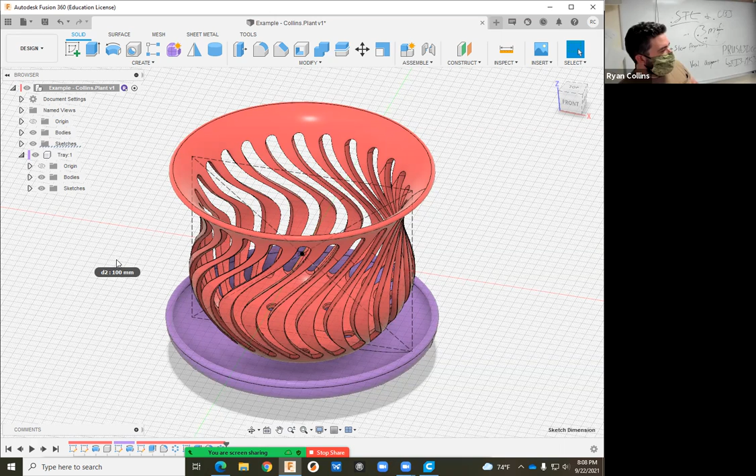The main goal is, again, at least 2 components, probably just 2 components, must have at least drain holes or some other sort of feature, and it's created using profiles that are revolved. Pretty straightforward. The appearance is optional, but if you want it to be there, super freaking cool. Okie doke. Have fun with it and please ask questions.